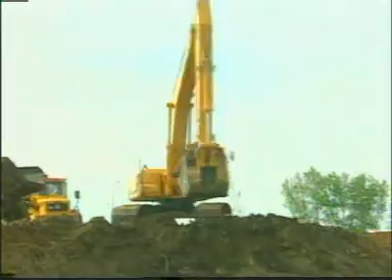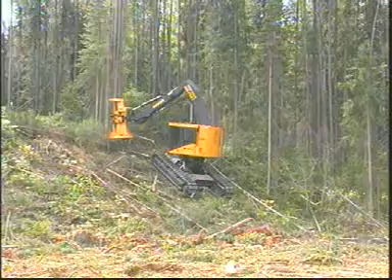Every day, all over the world, millions of tracked machines are at work in agriculture, construction, mining, and other industries. A third of these machines are moving on Berco undercarriages.

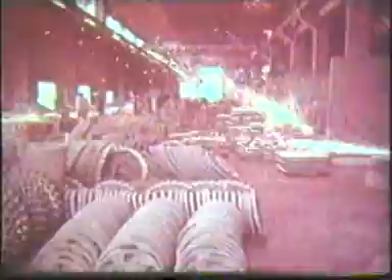The company was founded in Copparo, near Ferrara, Italy, in 1920, when Ezio Bertoni opened a little repair workshop. He and his partner, Roberto Cotti, called their business the Bertoni and Cotti Mechanical Workshop, which led to the name Berco. Gianni Bertoni, Ezio's son, joined the company in the 60s, and in just a few years, the Berco workforce grew to 2,000.

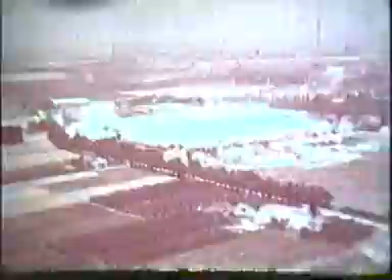When his father died in 1977, Gianni transferred 50% of the business to the German multinational Hoesch, which subsequently took over the entire company stock in 1986. Berco has expanded over the years, with factories in Castelfranco Veneto and Bassano being added to the original Copparo factory.

Every year, Berco produces over 250,000 tons of finished product, with a turnover of more than €500 million, providing work for over 3,000 people. Berco invests continuously in product and process improvement, spending over €30 million a year on research, development, and new machinery.

Berco is part of ThyssenKrupp, the Dusseldorf-based German multinational, a major company in the world steel industry and a leading manufacturer of components, machine tools, and plant engineering systems. With a constant eye to the quality of its products, Berco controls every phase of the production process, from the design stage right through to the delivery of the finished product.

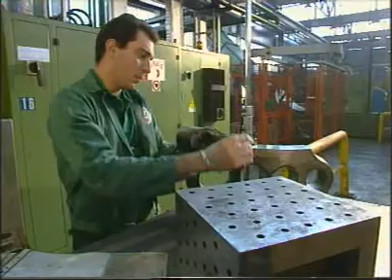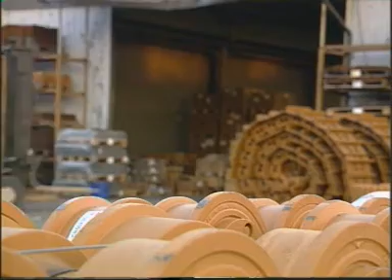The new ISO 9001 Vision 2000 directives were implemented in the company several years ago. Berco has been ISO 14001 certified since January 2000, with the introduction of eco-compatible procedures and the opening of a new waste disposal facility in 2001 and a new water purification unit in 2002.

Almost half of Berco's undercarriage components are sold all over the world on the aftermarket, bearing the Berco brand name. And over 55% of the products go to factories of original equipment manufacturers, known as the OEM market.

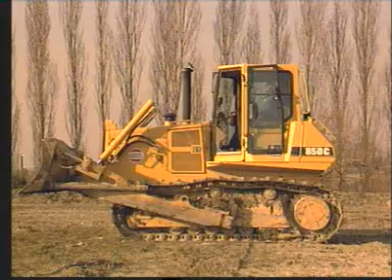Every year, Berco produces 140,000 idler groups, 1,300,000 rollers, 180,000 track chains, 6 million track shoes, 180,000 sprockets. A total of over 250,000 tons of finished product a year. In order to meet the wide-ranging needs of its customers, Berco is organized in 5 divisions.

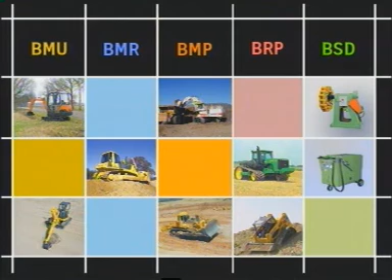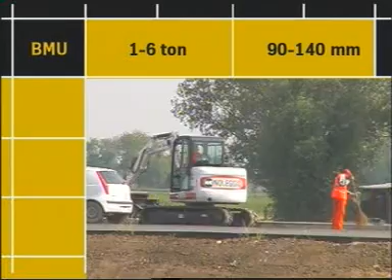The Berco Mini Undercarriage Division produces undercarriage systems for machines weighing 1 to 6 tons, with track chain pitch ranging from 90 to 140 millimeters. The Berco Medium Range Division makes components for machines with weights ranging from 7 to 50 tons and chain pitch 140 to 216 millimeters.

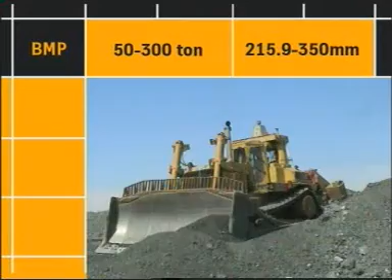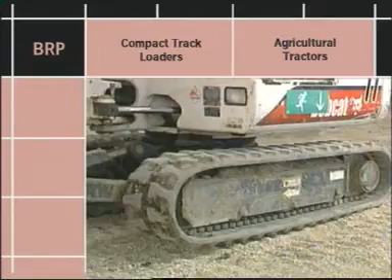The Berco Mining Products Division produces undercarriage systems for large-size machines with weights ranging from 50 to 300 tons and chain pitch from 216 to 350 millimeters. Berco Rubberized Products offers a full range of components for machines with rubber-tracked undercarriages, from compact track loaders to agricultural tractors.

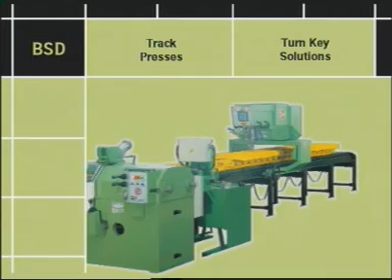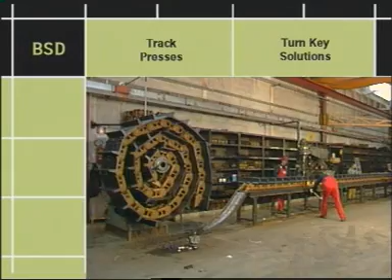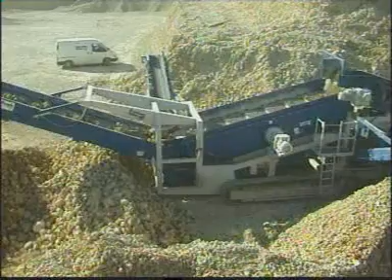The Berco Service Division produces a complete range of equipment for servicing tracked machine undercarriages, including hydraulic presses, track shoe bolt torquing units, and track chain winders. Berco does much more than supply components. It also designs and builds complete tracked undercarriage systems, both for standard machines and special applications.

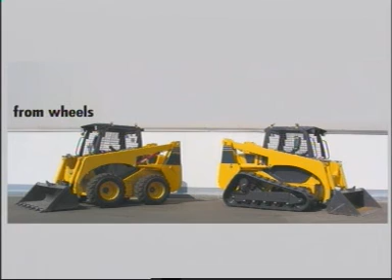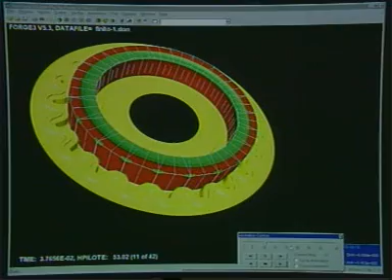An important example of this is the CTL, Compact Track Loader project, in which Berco has developed 6 undercarriage systems complete with track frame and rubber track. With its thorough knowledge of the product and the use of modern technology, Berco is able to help its customers right from the design stage, using dedicated software such as CAD and FEM to verify the strength of the components.

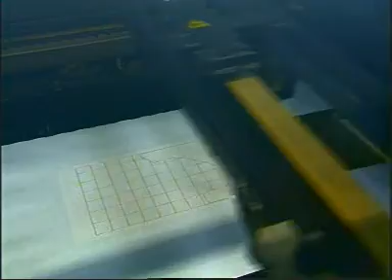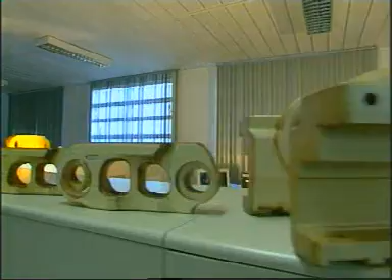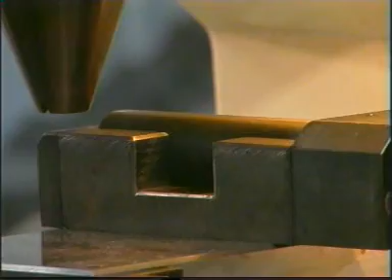Computerized rapid prototyping machines are used to create 3-dimensional models, making it possible to assess the functional and appearance characteristics of individual components and assemblies before the production stage. The Materials Development and Metallurgic Laboratory uses highly advanced techniques to provide all the necessary support to the engineering management in the different production areas.

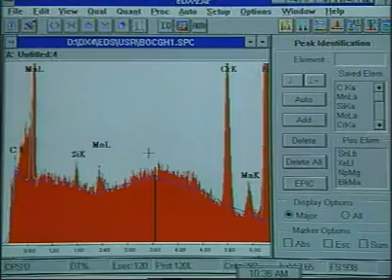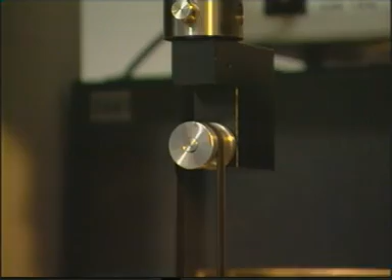Wear resistance and mechanical properties are key factors in undercarriage component performance, and this is why Berco dedicates so much energy to materials research and development. Wear tests are conducted on samples that have been subjected to different heat treatments in order to lengthen component life, even in the most extreme operating conditions.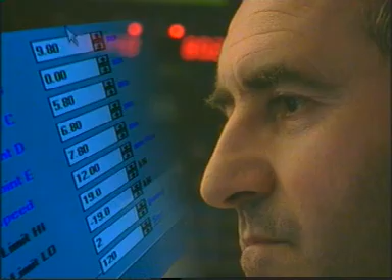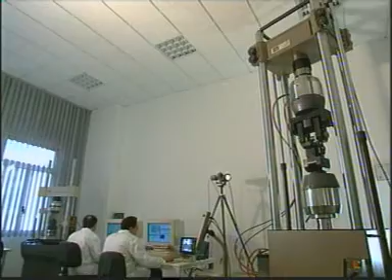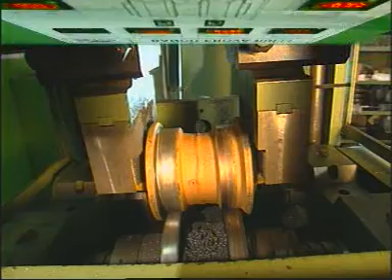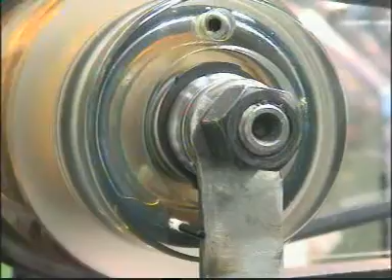Photoelasticity and strain gauge techniques are used to analyze the stress and fatigue states of individual components and assemblies. Before going into series production, the components are sent to the Reliability Testing Department, where a full range of test machines help to greatly reduce the time and cost needed to optimize the finished product before the final field tests. After the laboratory testing stage, Berco completes its design procedure with a series of field tests on undercarriage system prototypes.

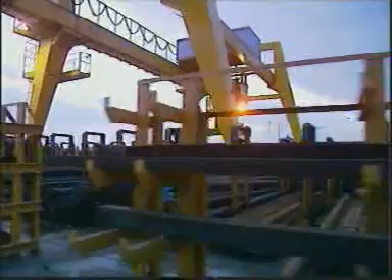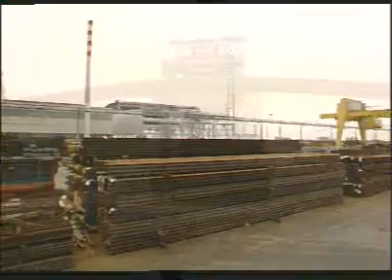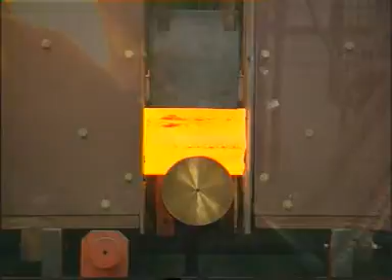The entire production process is managed and controlled internally, from the processing of the raw materials right through to the painting of the finished components, guaranteeing highly reliable procedures and constant quality. Considerable resources are dedicated to the continuous development of core competencies, such as hot forging.

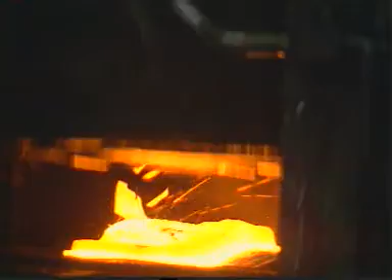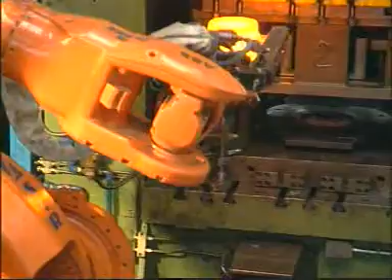A company's strong point is the 29 hot forging lines, which produce 15 million track links, over 2.5 million half roller shells, and 700,000 sprockets and segments annually. This massive forging production requires over 7,000 forging dies, produced inside Berco, either by electrical discharge machining or on high-speed work centers.

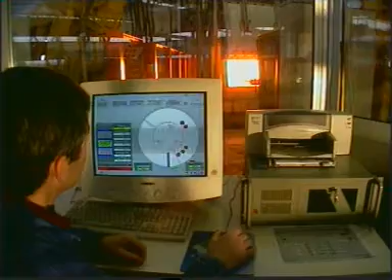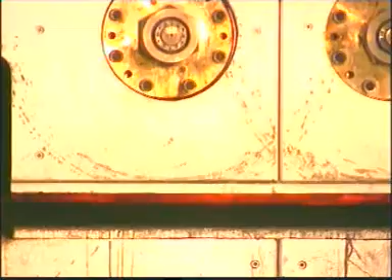The new hot forging line for large-size forged parts and mining components is a massive expression of Berco innovation in the forging field. The line, with its 32,000-ton screw press, produces idlers, sprockets, and sprocket rims. Previously, these components were cast and trimmed manually in a costly process.

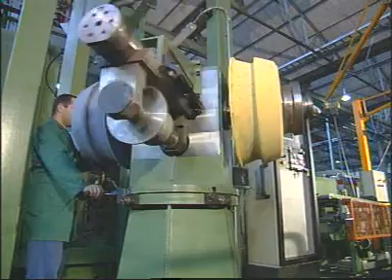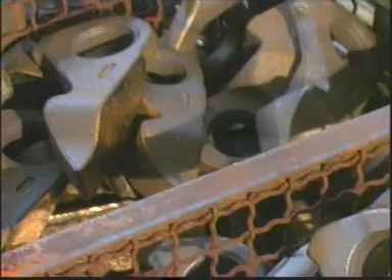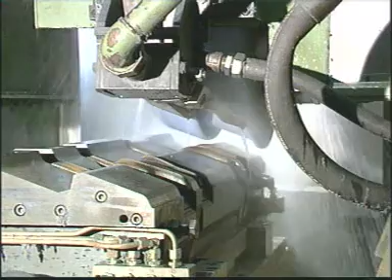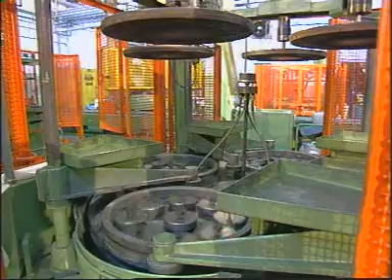The urge to bring a competitive edge into production technology has often led to the creation of totally unique, specially tailored solutions, such as the master split link process. This process uses innovative chip removal techniques with creep feed grinding, which has revolutionized the production process, streamlined the machining stages, and notably improved the quality of the end product. The production processes for strategic components have been developed and implemented internally by Berco to guarantee maximum reliability.

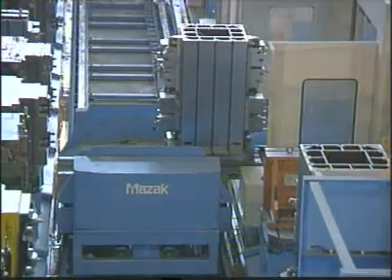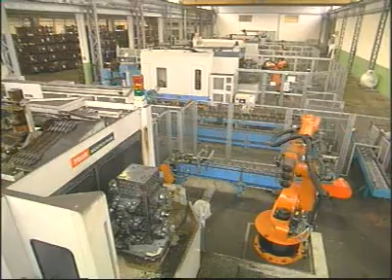Flexible, computer-managed production systems with sophisticated numerical control machines ensure even shorter retooling times in production changes. The new roller brackets machining lines use flexible production systems with a combined operation of numerically controlled lathes, machining centers, measuring stations, and handling systems.

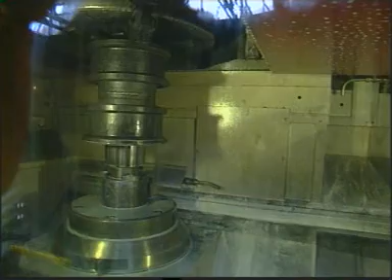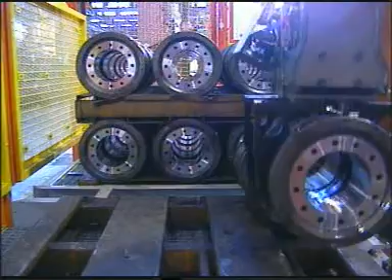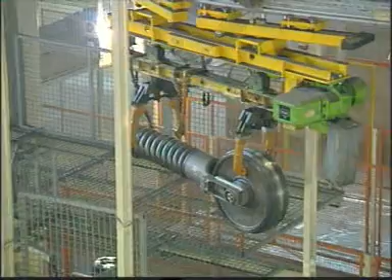The production of all front idlers, from fabricated idlers to complete idler groups, has been concentrated in the Castelfranco Veneto factory. The tread rims are produced on two highly modern multi-spindle circular ring rolling mills, the only ones of their kind, capable of rolling the component in a single operation.

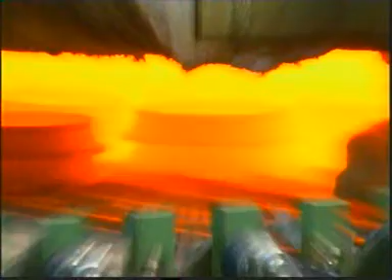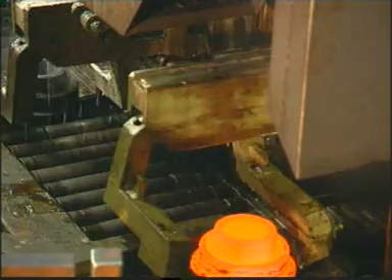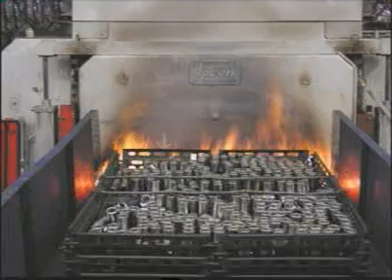In order to guarantee superior products with excellent wear resistance, Berco has, over the years, innovated and maximized all its heat treatment processes. There are over 100 heat treatment stations using techniques such as surface induction hardening and differential quenching, and equipment such as quenching and tempering process furnaces and case hardening furnaces.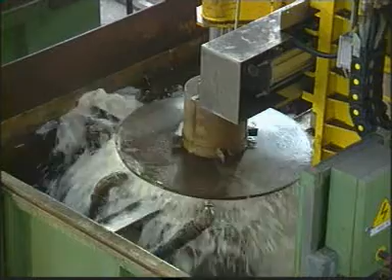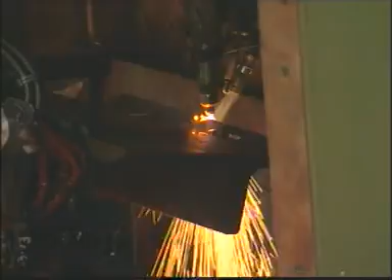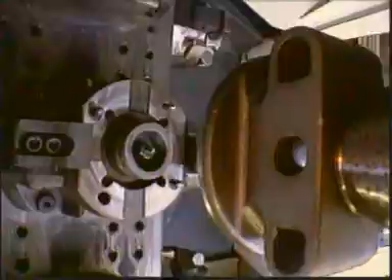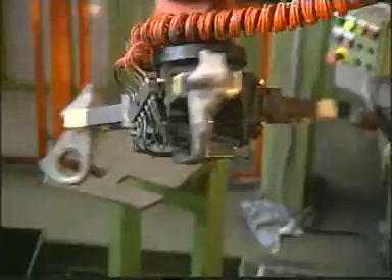Berco has opted for automation as the way to face up to the challenges of the new millennium. The company had its first robot installed in 1988, and now it has more than 300. Electromechanical handling robots, self-learning hydraulic robots, and Cartesian robots are used in a wide range of production applications. Examples include loading and unloading of machine tools, torquing of clamping equipment, and handling of the product in assembly processes.

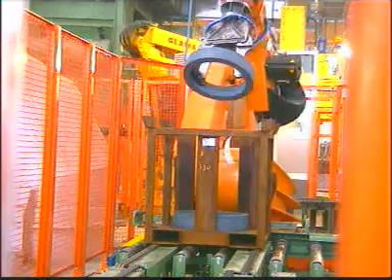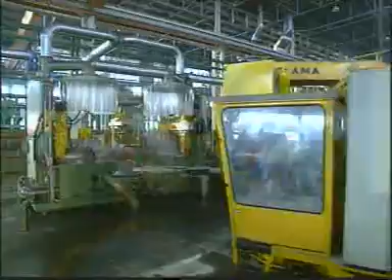The use of robots for the heavier and more repetitive tasks not only ensures high quality standards, but also gives support to human operators. The robot-assisted manufacturing lines are managed by computer-aided systems, which oversee all the process stages, right up to the final assembly and painting. This innovative, highly automated production system allows Berco to strengthen its undisputed leading market position on a continuous basis.

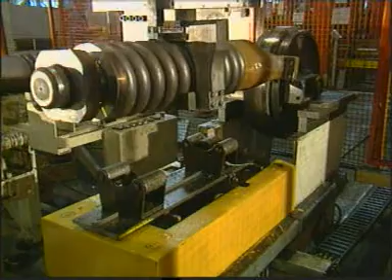A highly efficient logistics center capable of handling over 1,500 tons of product a day guarantees the rapid and effective dispatch of components to all customer destinations. Orders for small components can be processed quickly thanks to automatic, modular, computer-managed warehouses.

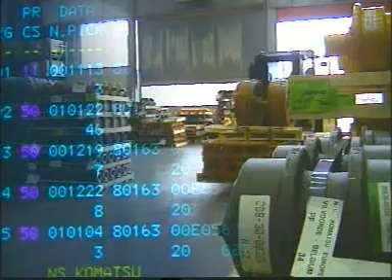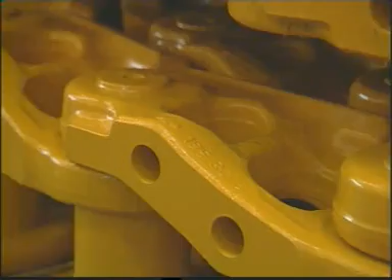There are also production and logistics centers in Germany, the United States, and Brazil. Thanks to its efficient organization, Berco is able to supply the assembly lines of the major earth-moving equipment manufacturers on a just-in-time basis.

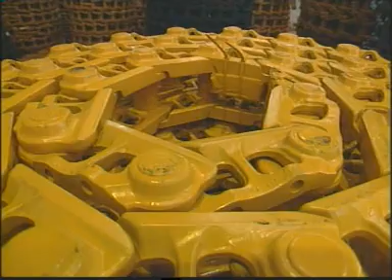With a network of over 200 local Berco dealers, the availability of Berco products can be guaranteed in all corners of the earth. With their long experience, readily available stock, and well-equipped workshops, Berco dealers are able to offer the customer a top-quality service.

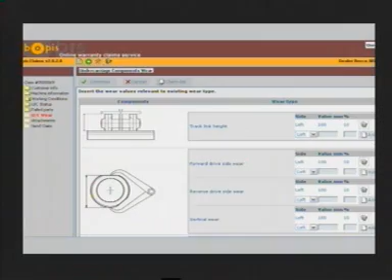Thanks to new communication technologies, Berco dealers can now access a wealth of information in the undercarriage products database online and find the right answers quickly and easily. Orders can also be managed in the same way, along with warranties and the main transactions between partners and customers. Refresher courses, tailor-made for specific dealer and customer needs, are organized for training both engineering and sales personnel.

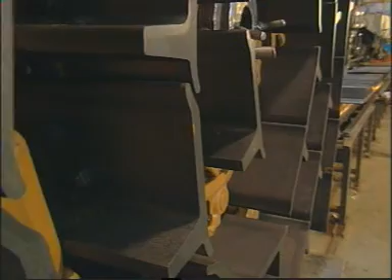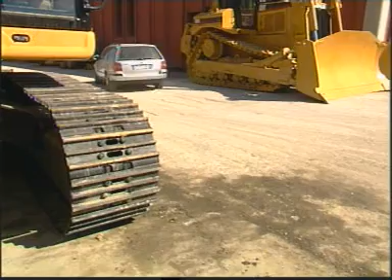Berco offers assistance in choosing the right component for the job and also provides on-site support with a team of engineering experts. Regular visits to customers to appraise undercarriage wear guarantee better product performance for lower machine maintenance costs.

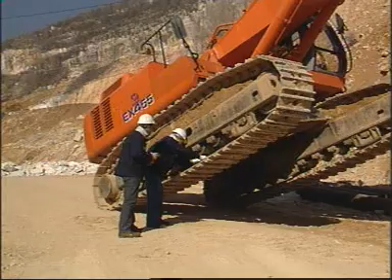Berco supports its sales activities by attending all the main trade fairs in the industry and provides its dealers with the most effective marketing tools. For Berco, customer satisfaction isn't just an objective, it's a company philosophy.